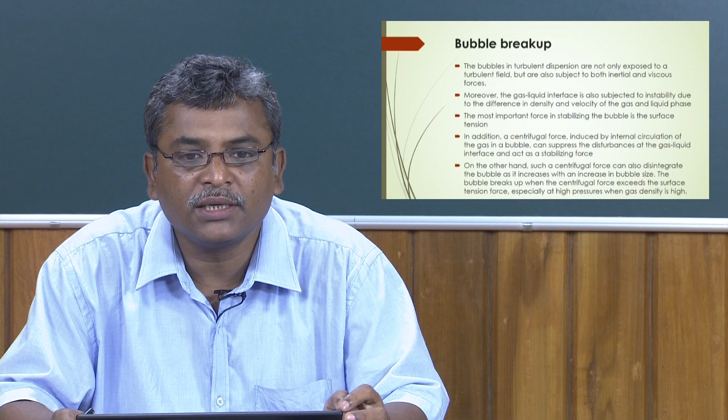In addition, a centrifugal force induced by internal circulation of the gas in a bubble can also suppress disturbances at the gas-liquid interface, acting as a stabilizing force. On the other hand, such a centrifugal force can also disintegrate the bubble as it increases with an increase in bubble size.

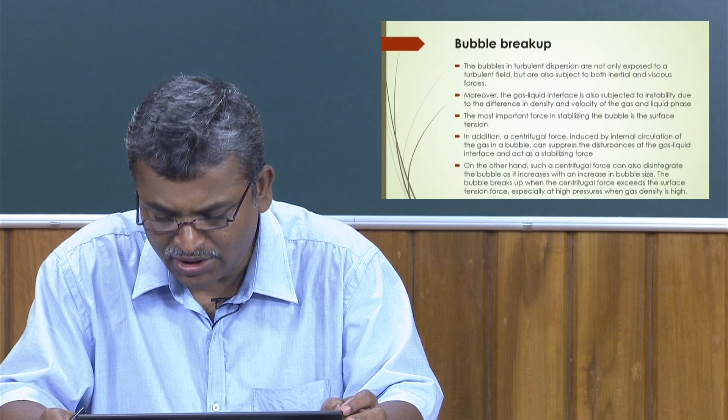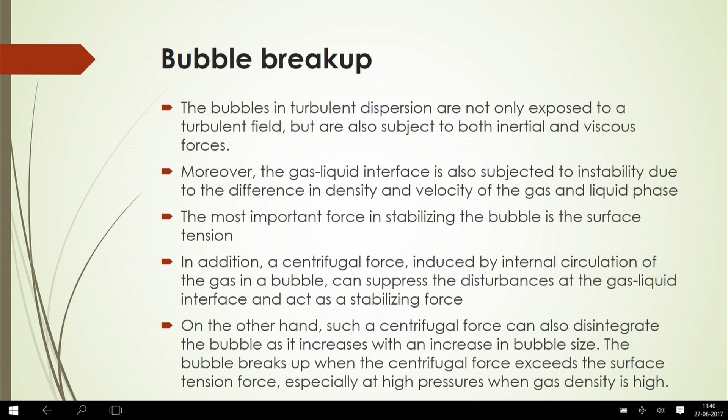The centrifugal force disintegrates the bubble, and this phenomenon increases with bubble size. So if size is increased, disintegration of the bubble increases, and the bubble breaks up when the centrifugal force exceeds the surface tension force, especially at high pressures when gas density is very high. In such cases bubble breakup happens because centrifugal force exceeds surface tension.

Now what is the fate of a bubble breakup? The fate of a bubble is determined by the breakup or deformation force acting on it, and the stabilization or restoration forces on the bubble.

If the bubbles are much larger than the micro scale of the turbulence, the viscous force can be neglected. In that case there are different forces acting for deformation that you have to know. Turbulent stress or eddy bombardment is one mechanism representing this bubble breakup fate.

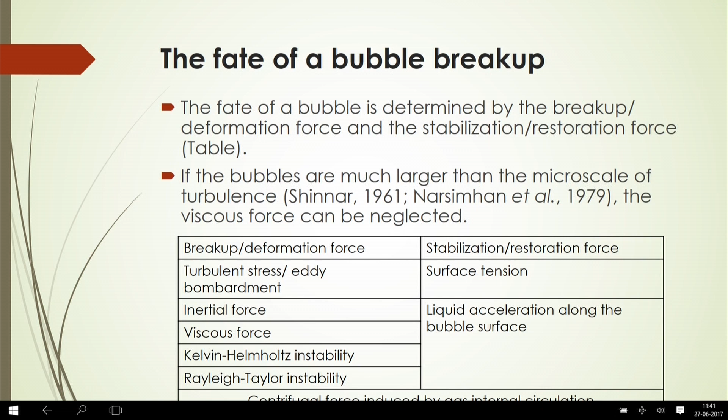Also, what is the stabilization or restoration force? If the breakup or deformation force is turbulent stress or eddy bombardment, then the stabilization force will be surface tension. Whereas for inertia force, viscous force, and other effects like Kelvin-Helmholtz instability and Rayleigh-Taylor instability, bubble liquid acceleration along the bubble surface is the main governing force for stabilization or restoration.

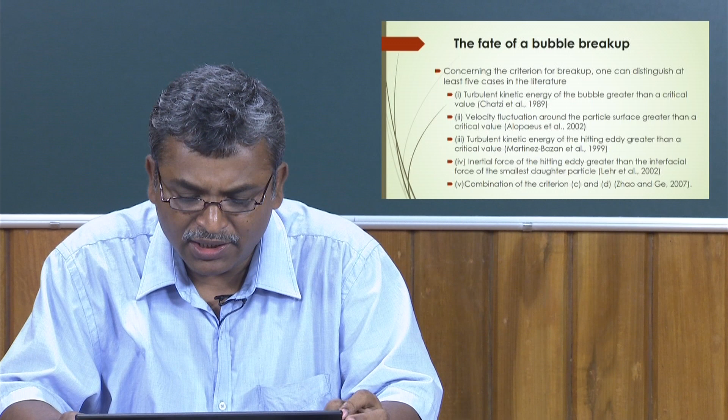If we consider the criteria for breakup, one can distinguish at least 5 cases in the available literature. Different investigators have presented different remarks on the criteria for breakup. For example, turbulent kinetic energy of the bubble greater than a critical value, as Chatzi et al. 1989 commented — if turbulent kinetic energy is greater than the critical value, the bubbles will break up. Velocity fluctuation is also an important factor for this breakup process.

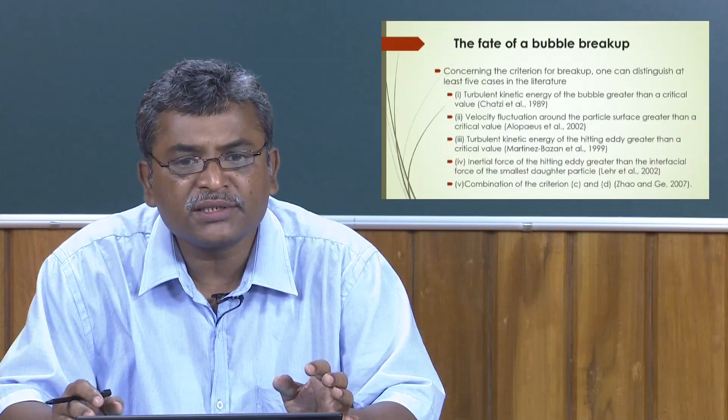When the velocity fluctuation around the particle surface is greater than a critical value, breakup of the bubble will be observed. Consider the turbulent kinetic energy: if any eddy hits the bubble, the kinetic energy with which it hits must be greater than a critical value, according to Martinez-Bazan et al. 1999, for there to be a possibility of bubble breakup.

Another important factor is that if the inertia force of the hitting eddy is greater than the interfacial force of the smallest daughter bubble formed after breaking up, then there is a possibility of bubble breakup. This criterion was explained by Lehr et al. 2002.

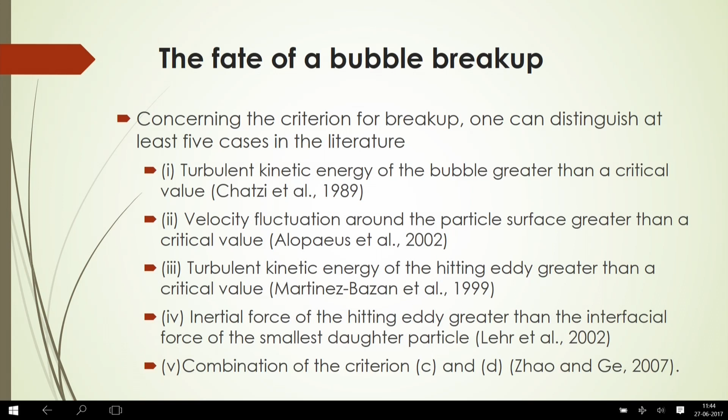Now consider the combination of these criteria: turbulent kinetic energy and velocity fluctuation, or the inertia force of the hitting eddy, if greater than the interfacial forces of the smallest daughter particle, then both energy and forces may be responsible for breaking up the bubble.

Several publications in the literature assume that bubble breakup occurs through bubble interactions with turbulent eddies. Only eddies approximately equal to the size of the bubble can break it, since larger eddies tend to transport the bubble rather than break it.

Very small eddies, smaller than the bubble, do not contain sufficient energy to break relatively bigger bubbles. So the kinetic energy carried by the eddy must be sufficient for breakup; very small eddies simply do not contain enough energy to break the bubble.

The important point is that some eddy surrounding the bubble hits it, and there may be a possibility of breakup. That eddy contains energy, and this energy should be sufficient so that the bubble will break up.

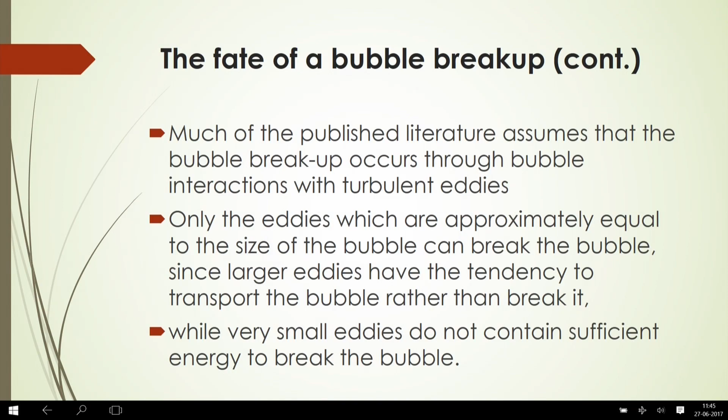For a complete bubble breakup model, the number of daughter bubbles produced upon breakup of a parent bubble, the daughter bubble size, the probability density function, and the breakup rate all need to be provided in order to express the bubble breakup efficiency.

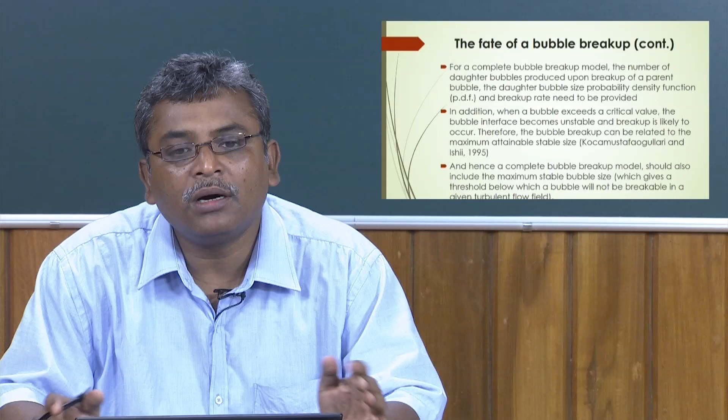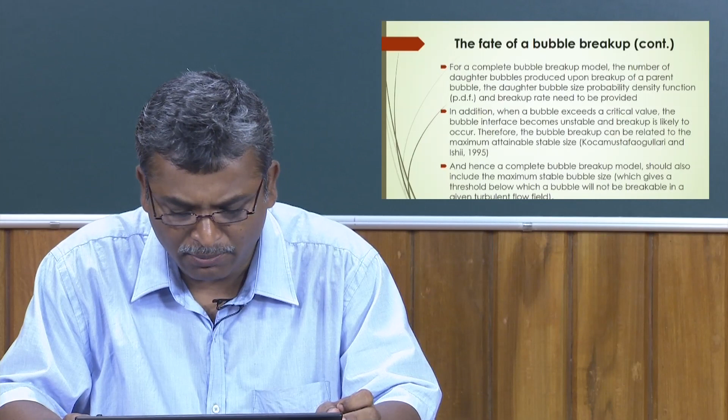When a bubble exceeds a critical value, the bubble interface becomes unstable and breakup is likely to occur. Therefore, bubble breakup can be related to the maximum attainable stable size. A complete bubble breakup model should include this maximum stable bubble size, which gives a threshold below which a bubble will not break up in a given turbulent flow field.

To know the bubble breakup efficiency, we need the frequency of bubbles formed after breakup, how many bubbles form, and the daughter bubble frequency. These depend on collisions between bubbles, the probability density of bubble formation, and the stability of the bubble — that is, at what size the bubbles will be stable in their final stage as daughter bubbles. Also, if the bubble exceeds a critical value, the bubble interface becomes unstable.

In that case, breakup is likely to occur, and this breakup is related to the maximum attainable stable size. There is some energy related to this stability, by which you can determine the size of bubbles that will be stable. We will calculate this later, including how to determine that stable bubble size.

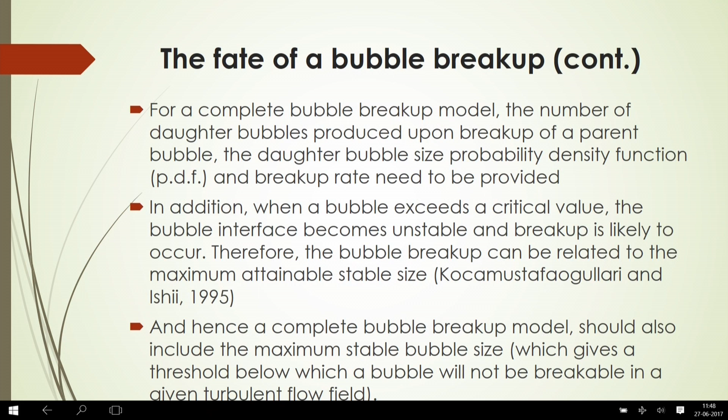So in this breakup model, how to calculate the density function of the breakup, the frequency, and the efficiency of the breakup all depend on the stable size of the bubble.

In turbulent flow, bubble breakup is caused by fluctuating eddies resulting in pressure variation along the bubble surface. Importantly, in most gas-liquid-solid fluidized bed operations, the flow is generally turbulent. In that case, bubble breakup generally happens due to fluctuating eddies which govern the pressure variation along the bubble surface, giving the breakup efficiency.

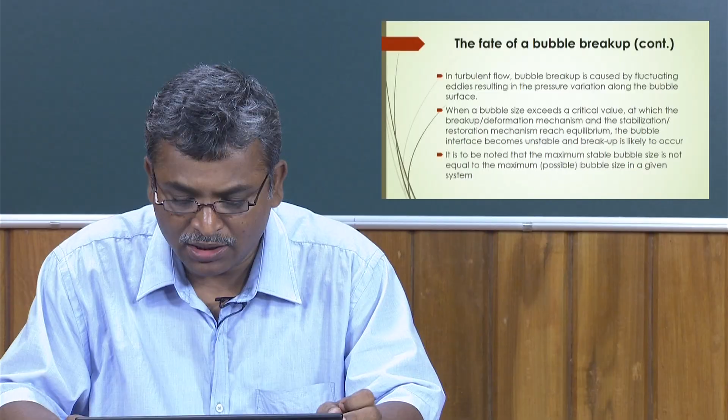When a bubble size exceeds the critical value at which breakup or deformation happens, and the stabilization or restoration mechanism reaches its equilibrium, the bubble interface becomes unstable and breakup is likely to occur. It should be noted that the maximum stable size is not equal to the maximum bubble size in a given system.

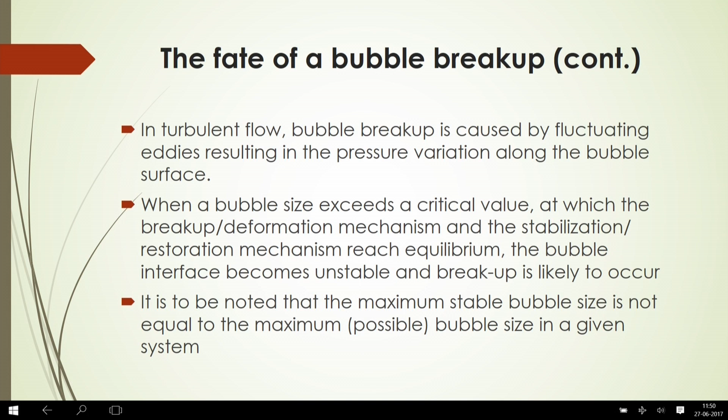This is important because the stable bubble size depends on how much energy is supplied in the turbulent flow. If the bubble size exceeds the critical value, then it will deform and lose its equilibrium, and the interface becomes unstable.

Breaking up into daughter or smaller bubbles. Now, how to estimate that stable bubble size? Levich 1962 recognized the importance of internal gas circulation during their experimentation. They observed that when a bubble moves, there is internal gas circulation inside it, and also a centrifugal force acting on the surface of the bubble. If this force is equal to the dynamic pressure induced by the gas moving at the bubble rise velocity, then the maximum bubble size depends on the physical properties of the system, as well as size and bubble rise velocity.

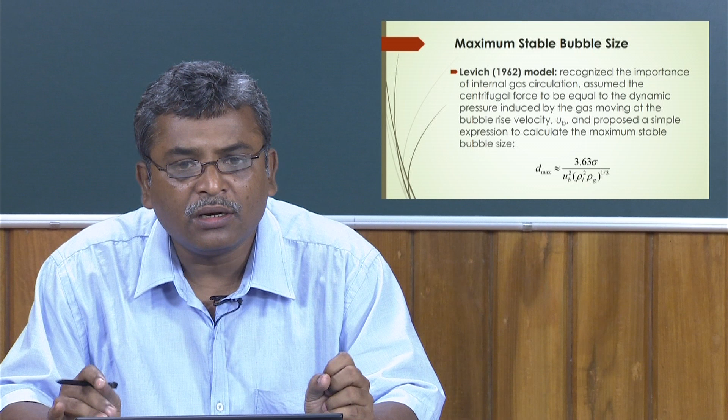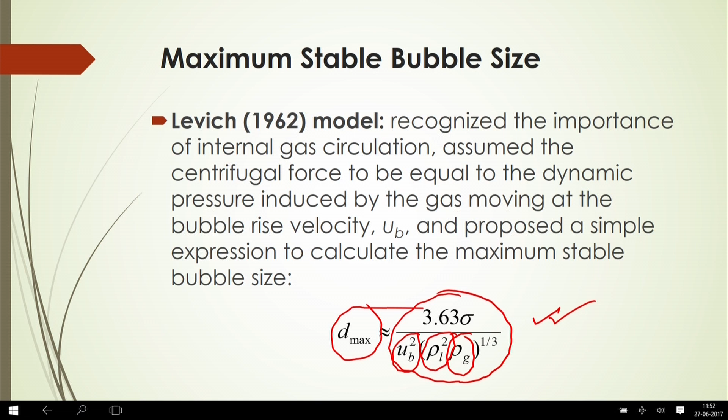They proposed a simple expression to calculate the maximum stable bubble size, D max. The correlation is D max equals 3.63 times sigma, where sigma is the surface tension, divided by u_b squared, where u_b is the bubble rise velocity, times the liquid density squared times the gas density, all to the power 1 by 3. By this equation, they calculated the maximum stable bubble size from the internal gas circulation phenomena and the rise velocity of the bubble.

Martinez-Bazan et al. 1999 gave another model to calculate the maximum stable bubble size in turbulent flow. They proposed the correlation: 12 sigma divided by beta times rho_L, to the power 3 by 5, times epsilon to the power minus 2 by 5.

Here sigma is the surface tension and beta is a parameter whose value from their experiment was beta equals 8.2. Rho_L is the density of the liquid, and epsilon is the energy dissipation per unit mass inside the bed. In this model, only the dominant forces—turbulent stress and surface tension—are considered.

So by this model also you can calculate the maximum stable bubble size inside the bed, for example in a three-phase fluidized bed. What is required to calculate here: the surface tension of the liquid, the density of the liquid, and the energy supplied for this turbulency inside the bed.

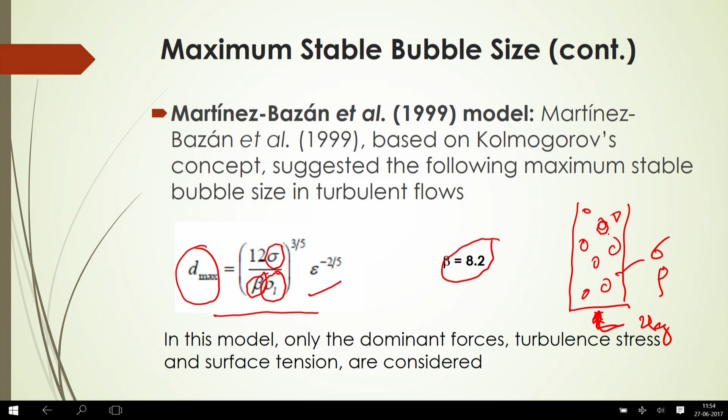If u_g is the gas velocity, the energy supplied would be u equals u_g, rho times u_g, and you can also calculate the kinetic energy, maybe half of rho u squared, where u is the gas velocity, or if liquid is also moving, you have to calculate the kinetic energy supplied inside the bed. You determine the turbulent kinetic energy per unit mass, from which you can calculate the maximum stable bubble size formed inside the bed.

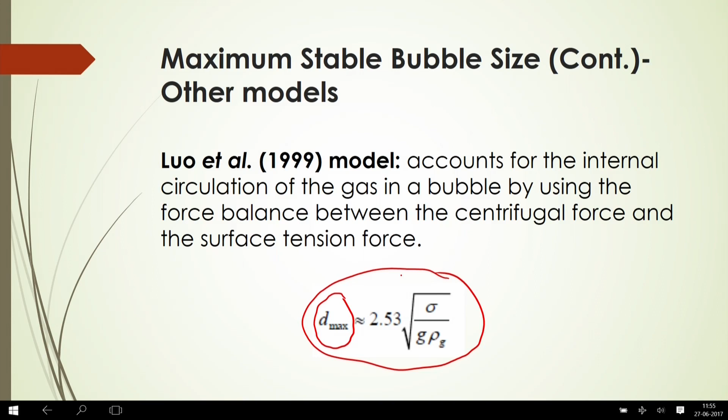Luo et al. 1999 suggested another model based on the internal circulation of the gas in a rising bubble, using the force balance between the centrifugal force and the surface tension force. From their model, the maximum stable bubble size is approximately 2.53 times the square root of sigma divided by g times gas density. From this relation you can calculate the stable bubble size using the Luo et al. model.

Lehr and Mewes 2001 suggested another formula, following the idea of Levich 1962 and Luo and Svendsen 1996.

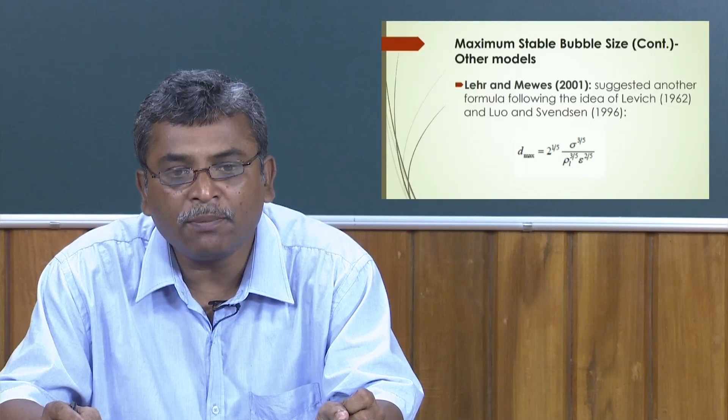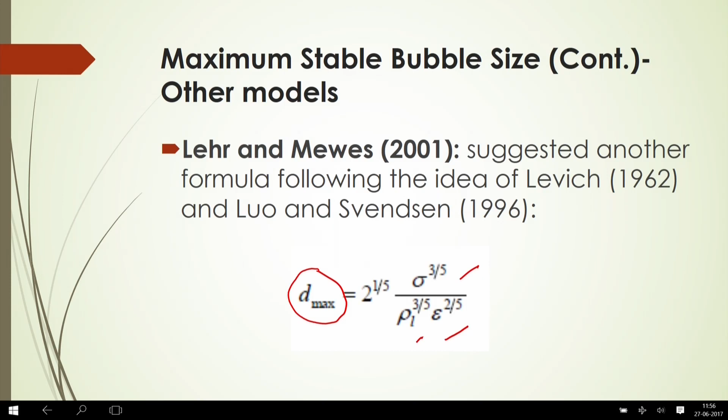They have also correlated this stable bubble size in terms of surface tension of the liquid, density of the liquid, and the energy supplied per unit mass to the bed. So here this D max will be equal to 2 to the power 1 by 5 into sigma to the power 3 by 5 divided by rho L to the power 3 by 5 into epsilon to the power 2 by 5. From these correlations you will be able to calculate what should be the maximum bubble size that is formed inside the fluidized bed of a 3-phase system.

Now, what will be the breakup rate or frequency, and how to calculate it? We should know what are the different forces, what will be the different mechanisms by which this breakup is happening, and what will be the rate for that.

This bubble breakup rate or frequency can be denoted by omega into V i, where i is the ith class of bubble. If we consider that there are k classes of bubbles in the fluidized bed, and a particular class of bubbles of diameter, suppose class i, then what will be the volume? This bubble breakup depends on the volume of that particular class of bubbles, and this class is defined based on the differentiation of the size of the bubble.

Now, this bubble breakup rate will be equal to 1 by breakup time into fraction of bubbles breaking. From this definition you will be able to calculate this.

Now, from this breakup rate, depending on turbulent fluctuation and collision, viscous stress, shear stress acting on the bubble surface, shearing off at the surface, and surface instability of the bubble, there are different mechanisms for these 4 types of forces acting on the bubble surfaces. Turbulent fluctuation and collision is the most important factor, and mostly this bubble breakup is considered to happen by this mechanism.

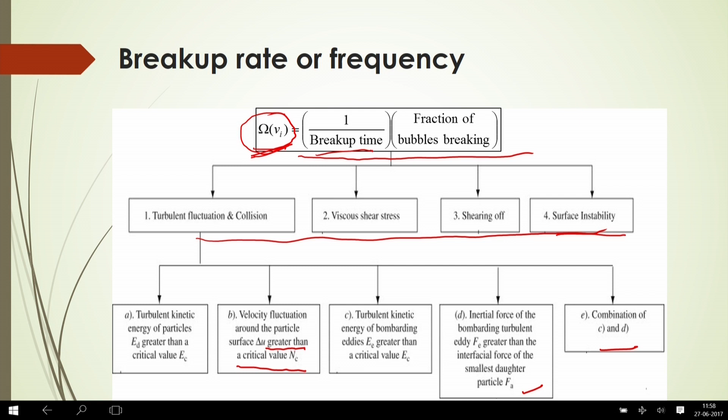Now, in this case, the turbulent kinetic energy of the particles, denoted by ED, is greater than the critical value EC. Also the velocity fluctuation around the particle surface, denoted by delta U, if greater than the critical value, then you can say there will be a breakup. Also, this turbulent kinetic energy of bombarding eddies Ee greater than the critical value EC, and inertia force of the bombarding turbulent eddy Fe greater than the inertia interfacial force of the smaller daughter particle, combining C and D. This is the mechanism by which you can expect this bubble breakup, and what should be the breakup rate. Based on this mechanism it will be calculated.

Now, this breakup rate is as per the Lee et al. 1987 model. As per this model, the kinetic energy carried by the turbulent eddies plays a dominant role in the breakup process. The imbalance between the kinetic energy and the surface energy governs the breakup process, and this imbalance is used to define the breakup rate.

Lee et al. 1987 developed a bubble breakup model using dimensional analysis, which results in the following breakup rate. From this equation you can calculate the bubble breakup rate, where this function f is the cumulative chi-square distribution function, and Ni is the bubble density with diameter di.

So here, of course, you will see that the bubble breakup rate by this Lee et al. model depends on the number of bubbles produced at that particular class, what will be the energy supplied if we know the diameter of that particular class, and also the distribution of those bubbles formed, and the physical properties of the system. Because of which you will be able to calculate the breakup rate. So based on this correlation you will be able to calculate it.

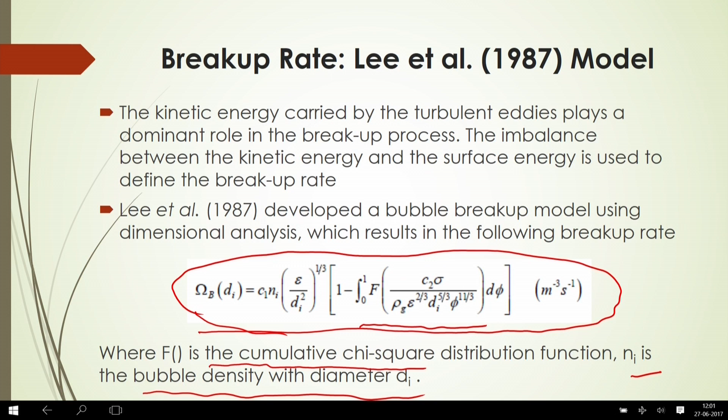So here a very important point is that you have to integrate this cumulative distribution of bubble breakup, and after that, what will be the number frequency of that bubble, what will be the distribution function - that you have to know, and after integration then finally you will be able to calculate from this.

And then the breakup rate as per Prince and Blanch 1990 model, based on the energy of the eddy and the surface tension force on the bubble - Prince and Blanch proposed a model for breakup rate, which is shown below.

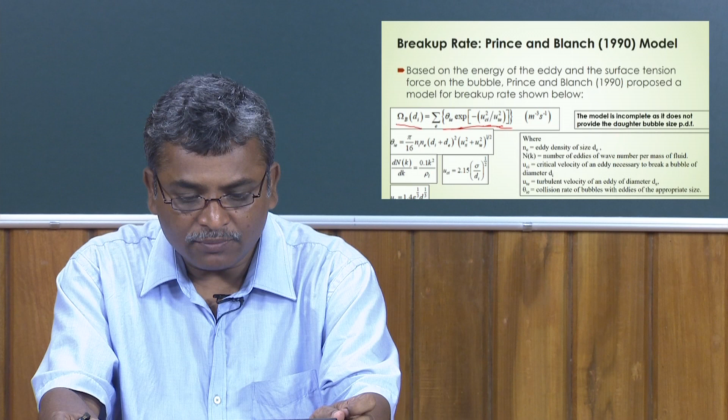This omega B here is a function of these values: theta Ie and also uce, and uTe. Theta Ie means here the collision rate of bubbles with eddies of the appropriate size. This collision depends on the number of eddies and also how many bubbles after collision will form, what will be the diameter of that particular class of bubbles formed, what will be the size of the eddies causing this breakup, and also the velocity of that particular eddy and particular class of bubbles.

So this collision of bubble and eddy can be calculated from this equation. The number of eddies of wave number per mass of fluid is also important here to calculate, along with the eddy density of size de, and also the velocity of the particular class of bubbles, that will be important to calculate.

uc is the critical velocity of an eddy necessary to break a bubble of diameter dI, and uTe is the turbulent velocity of an eddy of diameter de. This can be calculated as 1.4 into epsilon to the power 1 by 3 into d to the power 1 by 3. So from this relationship you can calculate the turbulent velocity of the eddy of diameter de, where de is the size of the eddy.

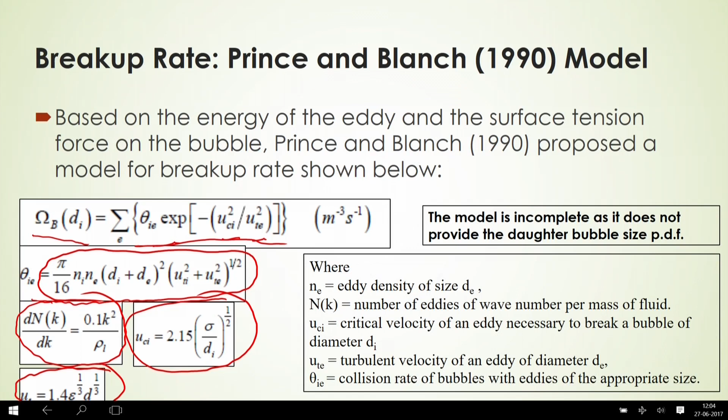This collision between eddy and bubble depends on this size and also the number of bubbles formed because of this collision. Now, daughter bubble size probability density function - how to calculate that?

After breaking up, one bigger bubble will form a number of bubbles, and those bubbles formed may not be the same as the source bubble, and the size will of course be different from that initial bubble. Bubbles formed after breaking may not be the same, or may be equal to each other, but that depends on the energy supply or uniformity of the flow inside the bed, and also the fluctuating velocity inside the bed.

Based on the theory of isotropic turbulence, Luo and Svendsen 1996 proposed a breakup criteria in which the breakup probability is proportional to the difference between the energy carried out by the arriving eddies and the increasing surface energy due to breakup.

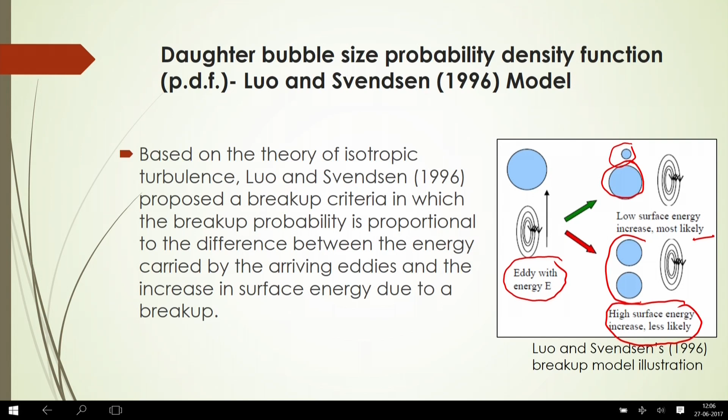So in this case, whenever an eddy is colliding with bubbles with energy E, and breaking into bubbles of smaller and bigger diameter - that is, unequal size bubbles - there will be low energy increase, most likely to happen, and high surface energy increase, less likely to happen, and because of which there will be equal size formation.

If local gas hold up increases, the collision between the eddy and the bubble will increase, and the number of bubbles formed will be higher, depending also on the size of the bubbles. So in that case, if there is higher gas hold up, it is seen that the number of bubbles will be higher, the size of the bubbles will reduce, and the frequency of the bubbles will increase.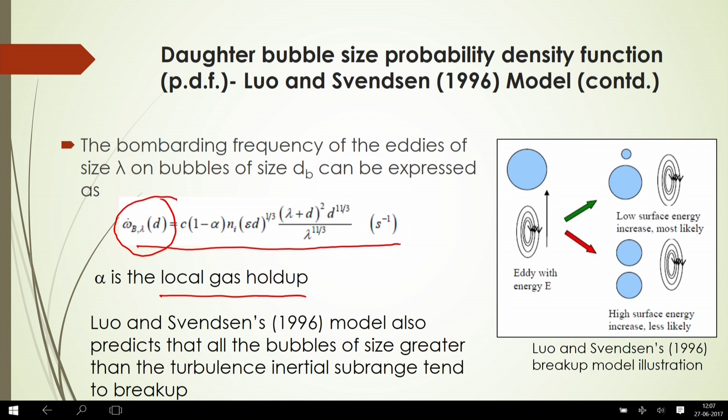Luo and Svendsen's 1996 model also predicts that all bubbles of size greater than the turbulence inertial subrange tend to break up. Now, what will be the probability of breakup into bubble?

The probability of breakup into bubble with a given fraction of fBV upon such bombarding was given as PB, equal to exponent of minus 12 CF sigma d squared by rho C beta epsilon to the power 2 by 3 lambda to the power 11 by 3. So in this case, what is CF? CF is the ratio of increased surface area with respect to the surface area of the parent bubble, and V is the volume of the parent bubble of size d.

As per isotropic turbulence theory, this C F, the ratio of increased surface area with respect to the surface area of the parent bubble, is a function of the fraction of bubble volume inside the bed. If this fraction of bubble volume increases, it is seen that C F will increase, but that depends on other factors as well.

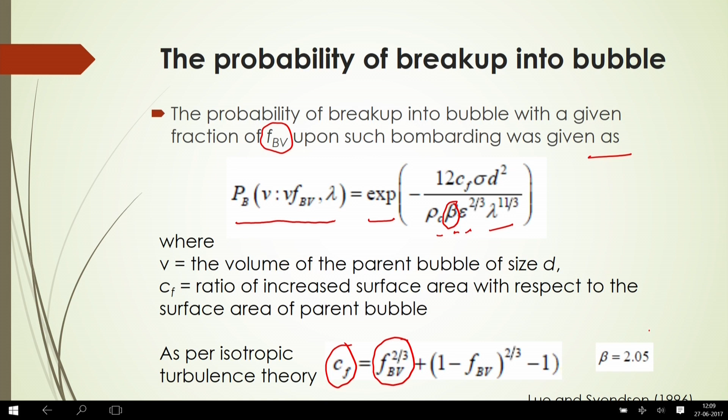There is one factor called beta, which characterizes the bombarding nature inside the bed. In 3-phase flow, it is seen that this beta will be equal to 2.05 as per isotropic turbulence theory.

Eddies which have a length scale comparable to the bubble diameter can cause breakup, while eddies of a larger scale will just give the bubble a translational velocity. Lee et al. 1987 proposed, based on this concept, the following phenomenological model for bubble breakup rate.

As per this phenomenology, the bubble breakup rate can be expressed by this equation. Here F B V is the volume fraction of one daughter bubble, and C is equal to 0.923. Xi are parameters of lambda by d, where lambda is the arriving eddy size.

Here also the eddy is pushing the bubble to break the parent bubble into daughter bubbles, and only eddies which have a length scale comparable to the bubble diameter will cause this breakup. If the eddy size is larger than the bubble, there will be a translational velocity of the bubble, which may cause this bubble breakup at a certain rate, and in that case the breakup is calculated based on this phenomenological model.

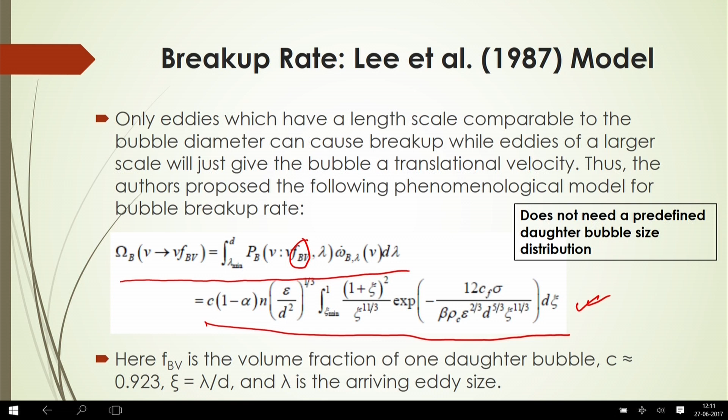This model does not need a predefined daughter bubble size distribution. Earlier models, of course, required you to know what the daughter bubble size distribution should be. In this case, it is not required to know the daughter bubble size distribution.

Martinez-Bazan et al. 1999 proposed a phenomenological model based on turbulence stress and surface tension analysis for daughter bubble distribution. As the bubble residence time within the breakup region is very short, they found that neither buoyancy effect nor the dynamics of bubble oscillation play any role in the breakup processes.

In this case, turbulence stress and surface tension are very important factors for the breakup processes. This depends on how long these bubbles reside inside the bed. If the bubble residence time within the breakup region is very short, then buoyancy effect or the dynamic effect of bubble oscillation does not actually affect these breakup processes.

Turbulence stress acts between two points, as shown in this figure - here is the parent bubble and another bubble here. In this case there will be stress. The surface restoring pressure, tau s, will be calculated as proportional to the ratio of surface tension to the parent diameter of the bubble.

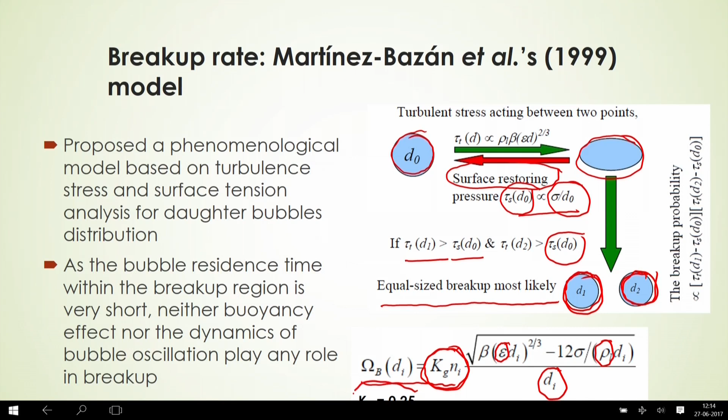Here d I is the diameter of the daughter bubble of class I, and rho L is the density of the liquid, and epsilon is the energy dissipation per unit mass. The factor k is generally taken as k equal to 0.25 in this case.

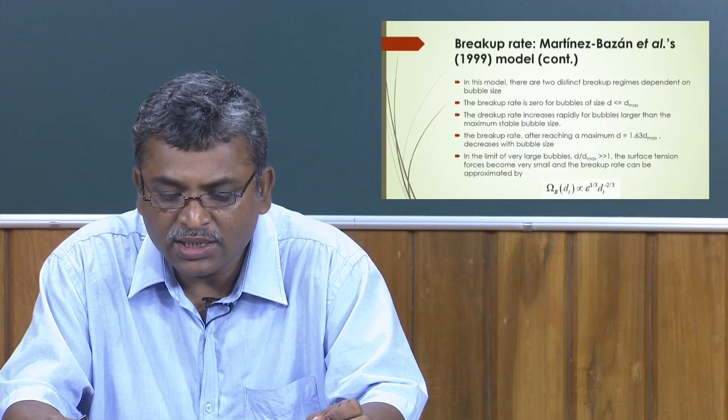In this model, it is seen that there are two distinct breakup regimes observed, depending on bubble size. The bubble breakup rate is 0 for bubble size if d is less than or equal to d max, and the bubble breakup rate increases rapidly for bubbles if it is larger than the maximum stable bubble size.

The breakup rate after reaching a maximum stable diameter: if the bubble diameter is 1.63 times the maximum stable bubble diameter, the breakup rate is seen to decrease with bubble size. This is a very important criterion—when the bubble size equals 1.63 times this maximum bubble size, the breakup rate decreases with bubble size.

In the limit of very large bubbles, if the ratio of bubble diameter to maximum bubble size is much greater than 1, that means if the diameter of any bubble is greater than the maximum stable bubble size, the surface tension force becomes very small, and the breakup rate can be approximated by this equation: omega b equals energy to the power 1 by 3 times diameter of the class to the power minus 2 by 3. This is a very important criterion for whether breakup will happen or not.

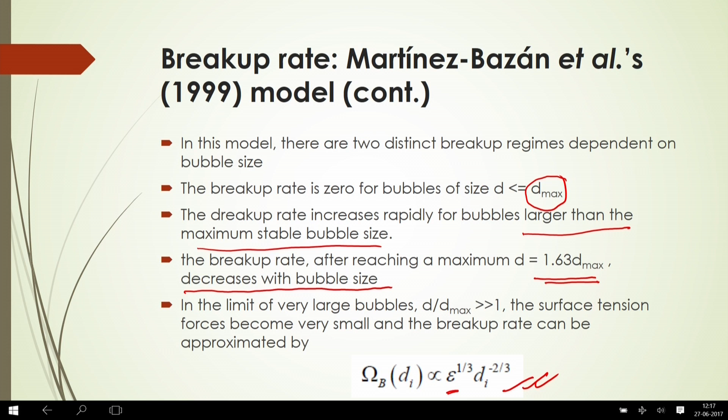There are two distinct breakup regimes observed here. First, the breakup rate will be zero if the diameter is less than the maximum stable size, and the breakup rate will increase if the bubble size is larger than the maximum stable size. If the bubble size equals 1.63 times the maximum stable size, the bubble breakup rate decreases with bubble size. If the bubble size is far greater than the maximum stable size, the surface tension forces become very small, and the breakup rate can be approximated by the given equation. For small bubbles of size smaller than d max but comparable to the critical diameter d c, the breakup rate can be calculated using another equation.

Now, the typical breakup rate with respect to bubble diameter, predicted by Martinez Bazan et al. 1999: as bubble diameter increases initially, the breakup rate will be higher, whereas as its size decreases from the maximum stable size, the breakup rate will decrease.

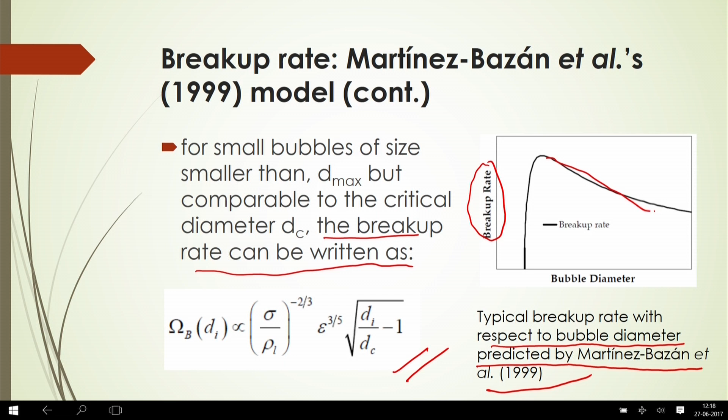Now, the daughter bubble distribution function based on the Martinez Bazan et al. model: how to calculate this? According to this model, the possibility of splitting off a fraction of bubbles of a given size from a parent bubble is proportional to the difference in turbulent stress acting between two points separated by a certain distance, and the confinement pressure due to the surface tension of the parent bubble. This produces an inverted U-shaped daughter bubble distribution function.

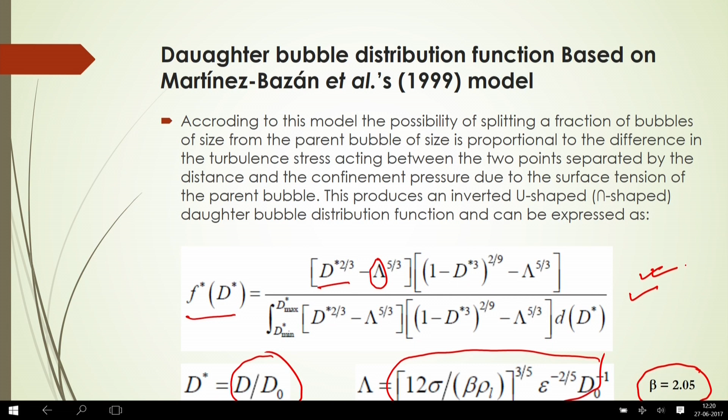This daughter bubble distribution function, f star d, is a function of the ratio of bubble size d by d0, where d0 is the initial bubble size, and lambda. This lambda is defined as 12 sigma divided by beta, rho L, to the power 3 by 5, times energy per mass to the power minus 2 by 5, times d0 to the power minus 1. Here beta is a characteristic factor equal to 2.05, and from this equation you will be able to calculate the daughter bubble size distribution function.

Now, Lehr and Mewes 2001 suggested another formula, following the idea of Levich 1962, for the bubble breakup rate of a bubble of size V into bubbles of size Vz and V minus Vz. They gave a correlation to calculate this bubble breakup rate. In this case, there are two portions of the equation, and you have to calculate the minimum of these two to get the bubble breakup rate.

Of course, all other factors depend on the gas holdup inside the bed, and V, the average bubble size, is calculated at a certain height of the column. This equation is valid for bubbles larger than the maximum stable bubble size.

It does not need a predefined daughter bubble size here, and the daughter bubble size distribution is a result that can be calculated directly from this model.

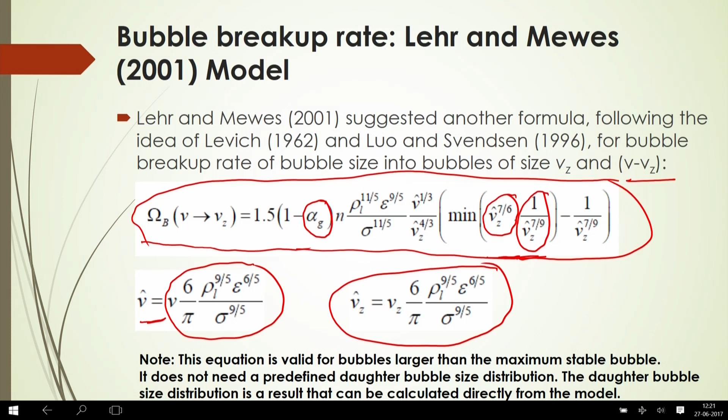The probability of breakup into bubble as per Lehr and Mewes model: the bubble breakup probability distribution can be expressed in terms of a normalized product of two functions related to the two breakup criteria. For a given collision between bubbles of size d I or volume V I and eddies of size lambda j and energy level epsilon lambda, a function of this eddy size, the probability function P b is calculated as F s into F d bar.

This F s is called the surface forces, and this surface force depends on the size of the eddy and the size of the bubbles, and also of course the surface tension of the solution.

And this F d is called the energy density criteria or energy function. Here, the kinetic energy of the eddy and its size is the main important factor causing breakup, and from these correlations you will be able to calculate what will be the F d, meaning the force due to kinetic energy density. Here d I is the parent bubble diameter and d k is the daughter bubble diameter. From these correlations you will be able to calculate the probability of breakup into bubble.

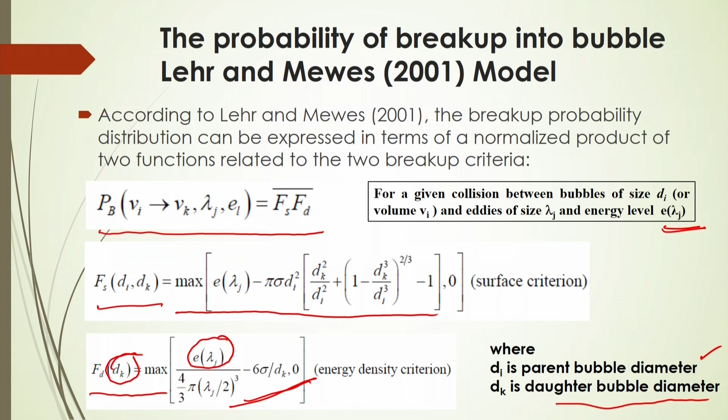For this breakup criteria of the bubble in the gas liquid solid fluidized bed, more details can be obtained from Kunii and Levenspiel, and also Yang's Handbook of Fluidization and Fluid Particle Systems. You should follow this reference for further reading, and there are other research articles where you can get more information about the breakup processes of bubbles in gas liquid solid flows.